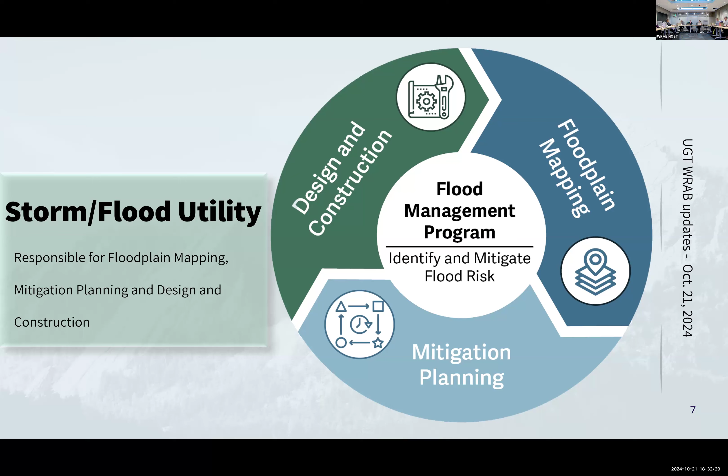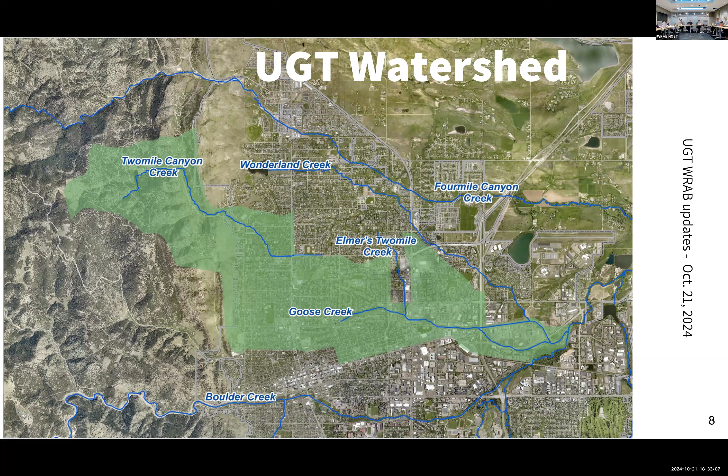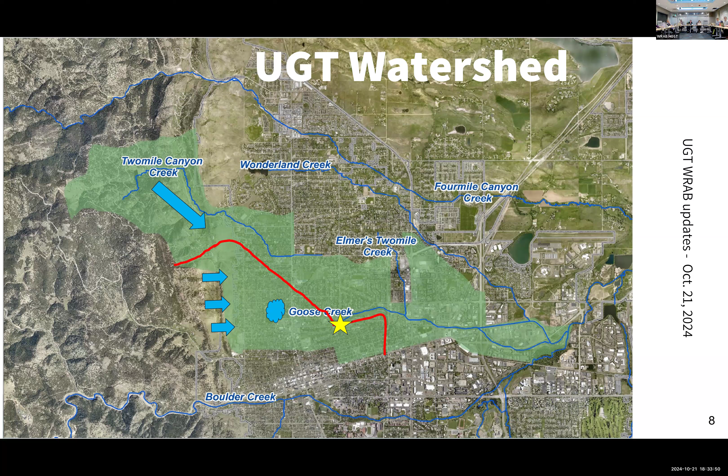Flood flow in the two creeks behaves in significantly different ways. In 2 Mile Canyon Creek, concentrated high-velocity floodwater pours out of the mouth of the canyon at Linden Street, creating a flash flood. Flood flow from Upper Goose Creek flows in multiple paths before ponding in North Boulder Park and continuing eastward, spreading throughout neighborhoods. They come together near Folsom Street and continue easterly to Boulder Creek.

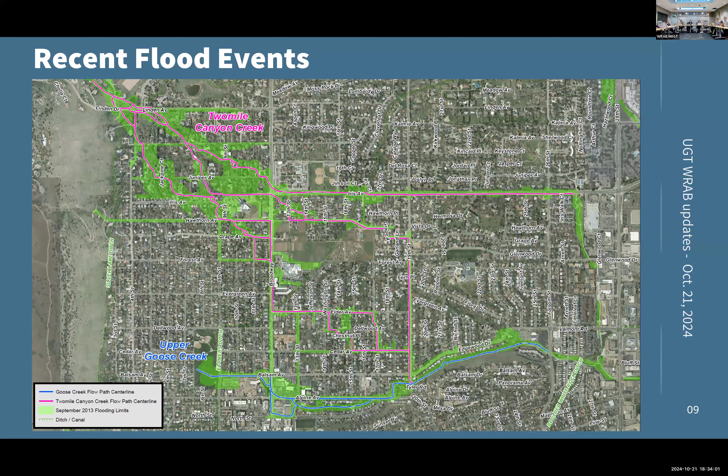Because of the differing behavior of the two creeks, the storm was estimated as a 100-year storm event in the upper reaches of 2 Mile Canyon Creek and a 25 to 50-year storm event in the Goose Creek Basin.

Another way to quantify these storm events is that the 100-year storm has a 1% chance of occurring in any given year, and a 25 to 50-year storm event has a 2 to 4% chance of occurring in any given year.

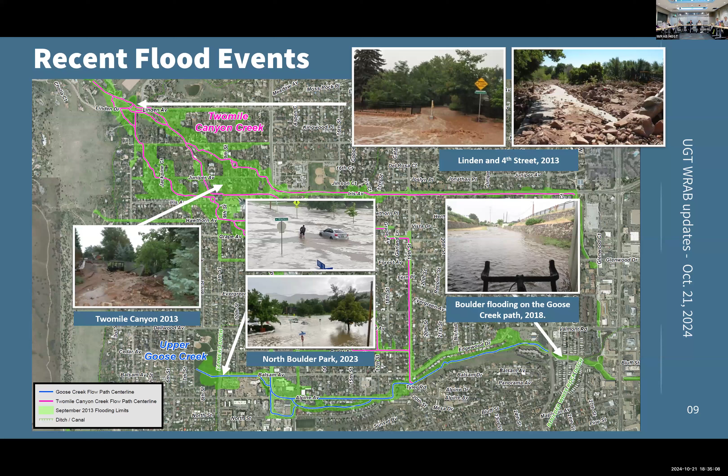The urgency of the Upper Goose Creek 2 Mile mitigation plan was reinforced by even more recent flood events in 2018 and in 2023. The mitigation plan was recommended by WRAB in March of 2023 and approved by City Council in May of 2023. The plan included extensive outreach and engineering, and identified protection for over 500 homes from the 100-year flood for an estimated construction cost of $43.2 million.

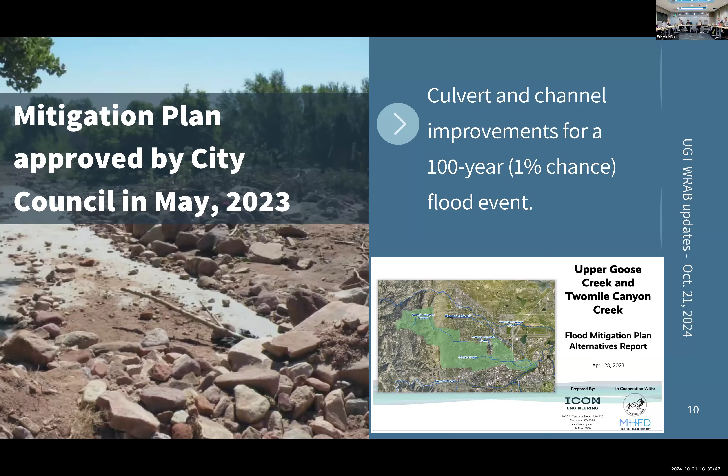At the request of City Council, a robust community outreach effort was undertaken to reintroduce the mitigation plan, gather input, and inform the community of the results. The storm flood team hired a communications manager who created multiple forms of communication, such as website updates, mailings, flyers, and an email address specifically for questions and comments about our flood projects. We did even more. We instituted open office hours and held community meetings in local schools, offering more in-person opportunities to engage with staff and ask questions.

From our outreach efforts, we gathered community interests that are extremely important to our flood projects. Everyone wants to understand the level of flood protection and the accuracy of data used to predict flood extents. Of course, there's a sense of urgency for flood protection.

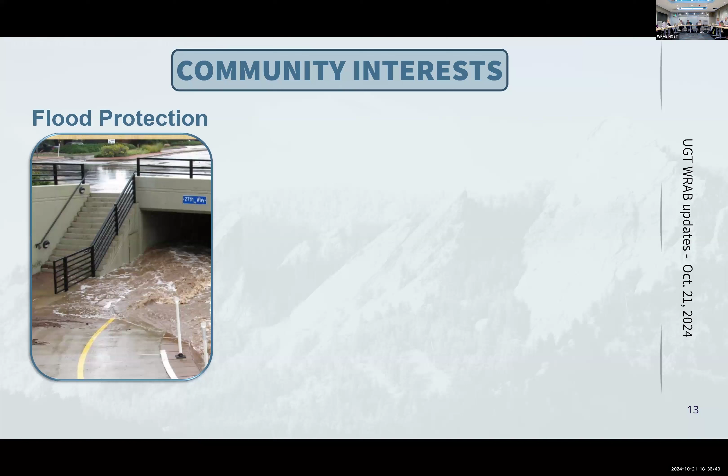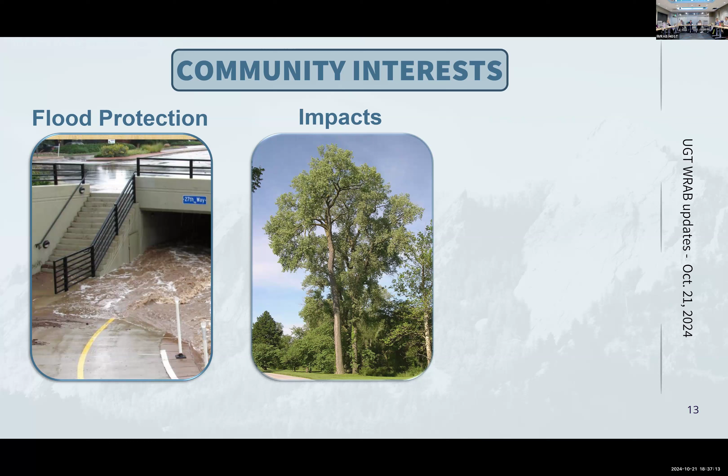Every project has impacts as the project is taking place. We recognize that wildlife utilizes the areas in and around existing creeks, and there are key nesting and denning times. Mature native trees are a valuable resource and will be surveyed, evaluated by an arborist, and protected whenever feasible. Native riparian vegetation and trees will be replanted. Full restoration after construction to an even better, more sustainable riparian habitat is a major goal of stream projects.

Construction is not a pleasant experience, but it is temporary. It causes disruption to traffic and temporary inconveniences. There are concerns over phasing and duration. Often acquisition of additional easements are required, whether temporary for construction or permanent for ongoing maintenance. Projects can be close to backyards and homes. Maintenance is always required after it is all done. The more resilient the project design, the less maintenance is required.

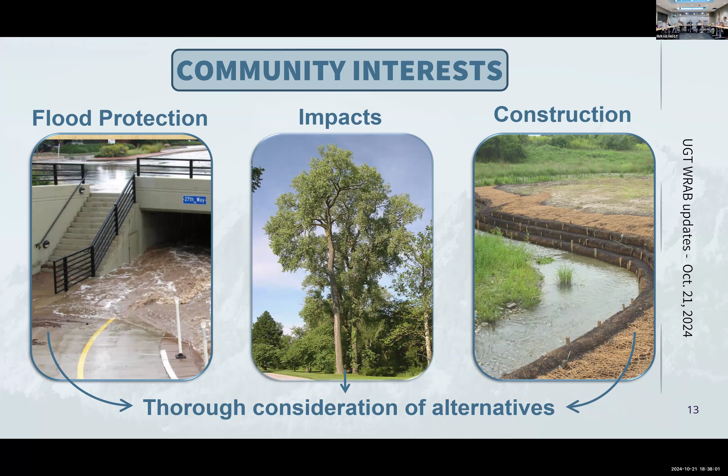Taking all these concerns into consideration in the selection of alternatives, where is the project going from here? Let's take a look at some project updates.

Key project goals align with the comprehensive flood and stormwater plan adopted by the city in 2022. Among these are to protect life and property by reducing the extents of the high hazard zone and the 100-year floodplain, to minimize impacts to private properties and wildlife as a result of the proposed improvements, and to provide variable natural looking features representative of the upstream natural watershed. This means mimicking the natural variability of the creek wherever feasible, and developing a unifying aesthetic along the creek corridor.

Ultimately, these goals come together to design a high-functioning, low-maintenance stream that is resilient to flood events for a long time into the future. To provide this high-functioning, low-maintenance stream, nature-based design has been shown to be the best sustainable solution to flood control.

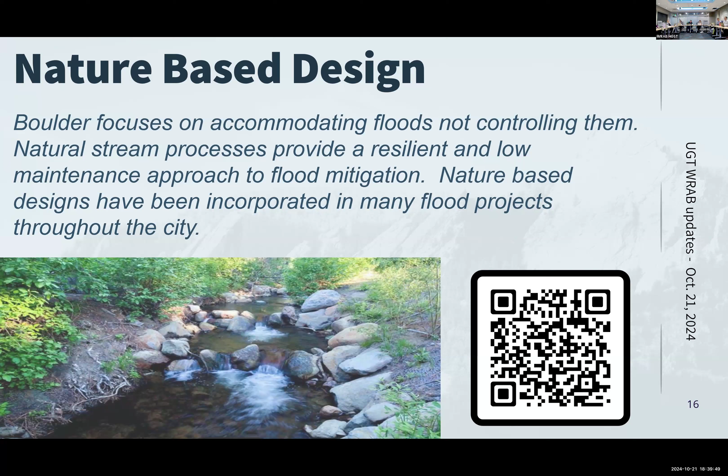This QR code will take you to a presentation on nature-based design on our website. In Boulder, the plan is to accommodate floods rather than controlling them by focusing on natural stream processes whenever feasible, to construct resilient infrastructure that is adaptive to changing climate conditions, and to protect and restore the natural streams where they still exist within the city.

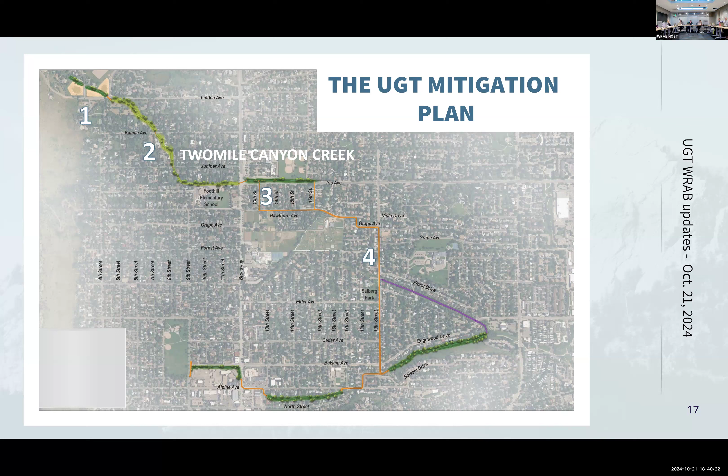Keeping in mind the goals of the city, the Upper Goose Twomile mitigation plan explored several alternatives with community input, such as detention, open channels, and pipe systems. These alternatives were evaluated and scored to determine the chosen alternatives and level of flood conveyance for 4 reaches in Twomile Canyon and for 6 reaches for Goose Creek, as indicated on the map.

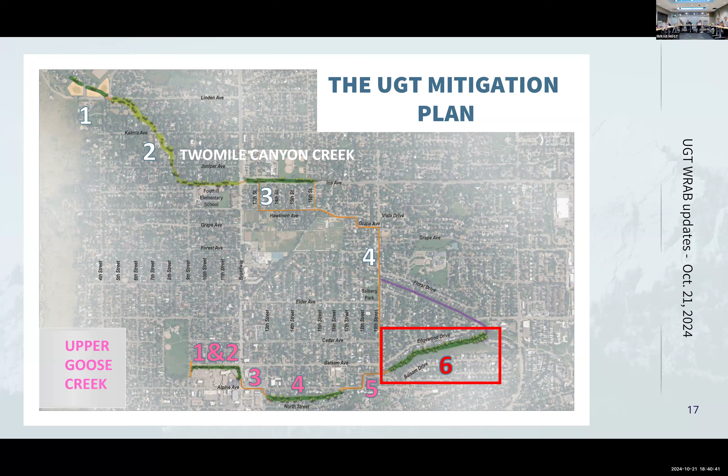The first phase of the mitigation plan is the lower reach of Goose Creek, shown here as Reach 6. This reach is currently an open channel with less than 5-year capacity, situated between the homes along the south side of Edgewood Drive and the hill to the south. Except for a short section on the western end, the creek is almost entirely south of the properties along Edgewood, lying mostly within the properties on the hill.

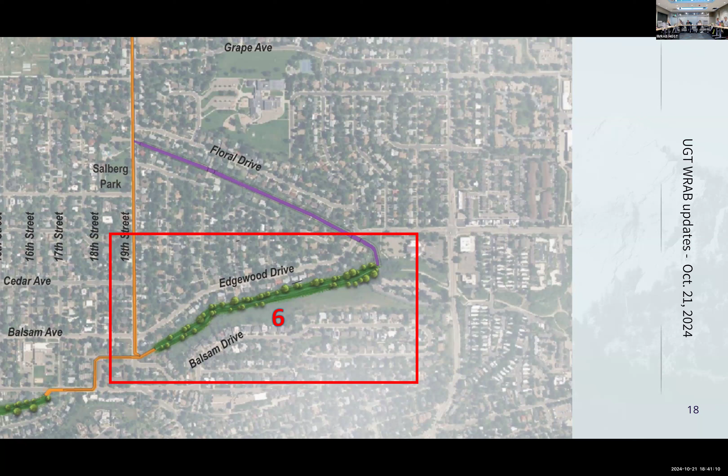The approved mitigation plan recommended a restored 100-year open channel along the existing creek. Within Reach 6, we can see there are 51 structures in the 100-year floodplain, 29 of which are in the conveyance zone. Edgewood Drive and 19th Street are in the high hazard zone.

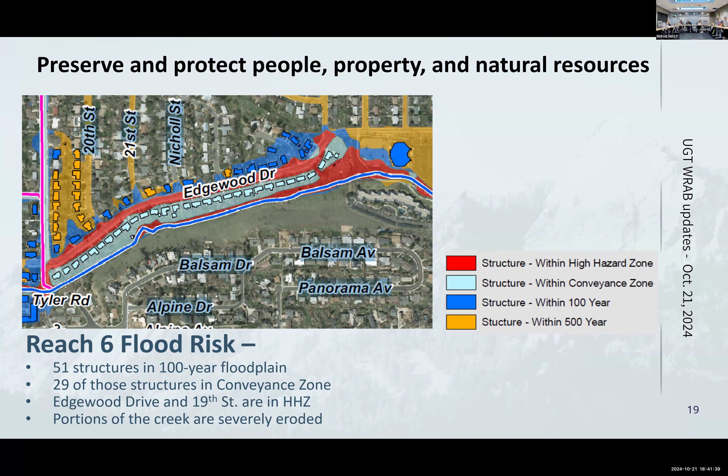Additionally, portions of the creek are in need of restoration. As a reminder, the conveyance zone is the minimum space required to carry the volume of the 100-year storm event. The high hazard zone is where the combination of depth and velocity produces the danger of cars and people being swept away.

The approved mitigation plan alternative recommended improvements to the existing creek along Reach 6 to provide a 100-year flood conveyance with some localized upstream stormwater improvements. Since this reach is at the bottom of the watershed, this project is needed to be able to accept floodwater from upstream in the rest of the watershed.

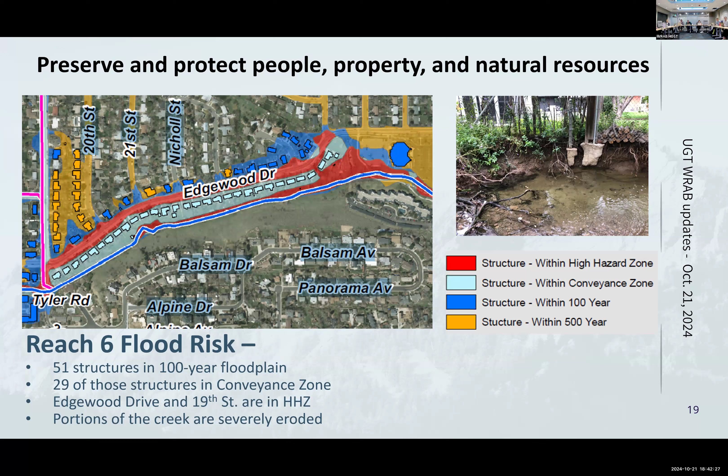Reach 6 is characterized by a steep slope belonging to the properties to the south, dense vegetation along the creek, and limited access through private properties. The majority of the creek lies within the properties on the hill.

Most of the homes along Edgewood Drive were built decades ago prior to the implementation of modern floodplain regulations, thus finding themselves in the floodplain. The tight corridor that remains only has the capacity to convey approximately a 5-year event, forcing additional floodwater into the streets and private properties.

A piped alternative along Edgewood Drive was briefly considered in formulating the mitigation plan, but deemed infeasible and not pursued. Subsequent to City Council's approval of the mitigation plan, there were significant community concerns about the channel approach in Reach 6.

As a result, the city agreed to revisit the concept of a piped alternative along Edgewood Drive. The city hired Icon Engineering to take a more in-depth look at the feasibility, constructability, cost, and the pros and cons of a piped alternative versus the open channel alternative.

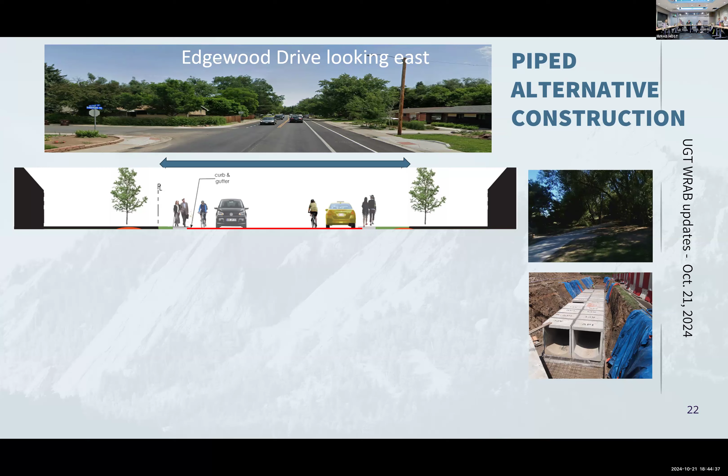To carry the existing flow would require 8 parallel 4x4 foot box culverts, each approximately a half a mile long, for a total width of 40 feet, requiring excavation of the entire roadway. This would cause major traffic and access disruptions for a year or more.

Because the culverts interfere with the existing sanitary, gas, and water mains and services, which cannot remain under and across the box culverts, new sanitary sewer, gas, and water mains would be required on each side of the street under the front yards of the homes on both sides, resulting in service interruptions.

Additionally, trees, sidewalks, and fences would need to be removed for the utility main construction, and trees and fences would not be able to be put back over the tops of the pipes.

A major consideration is that even with the culverts, the pipe system cannot capture all of the water from Goose Creek because the existing creek is much lower than the elevation of the required box culverts under the street. Approximately 20 to 25% of the floodwater will continue down the creek.

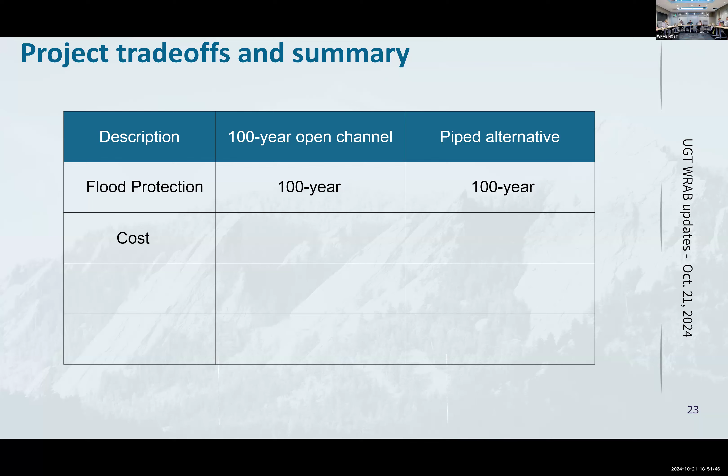I know one of the community members asked that we don't take anything off the table. But when you think about that, and just knowing how hydraulics work, it's not that with a lesser flow the amount of channel disturbance is proportional. You still end up with a significant component of what you would have if you put all of the flood flow in the channel, and then you have all of that disruption to Edgewood Drive and people's front yards as well.

This was not something that City Council asked for, something we did on our own to be responsive to feedback. The community members who organized around this asked us to look at 5 things, and this was one of them. But primarily because of the physics of the situation, and not being able to get all of the water into the pipe, we just don't feel like it's advisable to fix this, especially when you consider it's 5 times the cost and probably doubles the disruption and impacts that people would experience. So that's where we're landing on this.

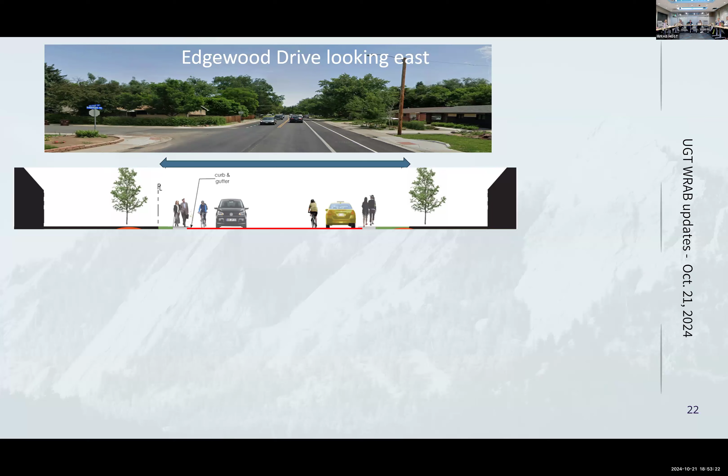And Debbie, I was going to ask you to go back to slide 20, if you can do that. I know you have animation, so that might be 400 clicks, but if we can get there quickly. There we go, that's the one you wanted?

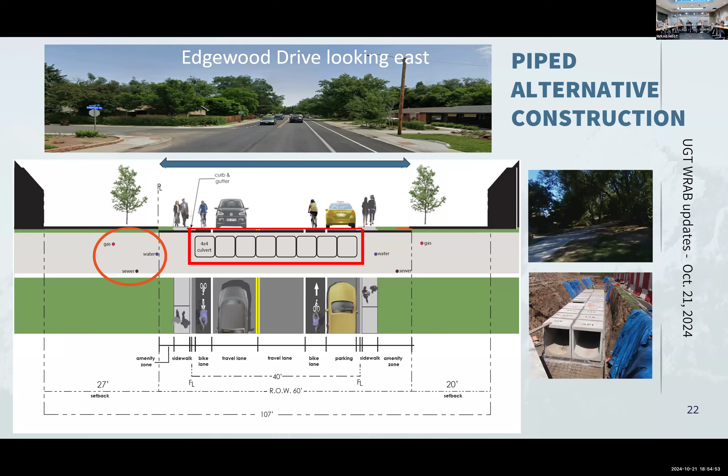So that's kind of where this puts us. And now if you'll go back to the timeline slide, thank you for working with me to get back to that.

So where that puts us, we wanted to do this update and share the information both with the community and the board. It would be our intention to now start working on the design, and the first step would be hiring a consultant to work with us on some of those details. I imagine we would have alternatives that we could work with the community on for the channel configuration and the slope stability and all of those things, with opportunity for the public to weigh in on that.

But that's the timeline that you see, with design happening in 2025 and 2026, and the desire to go to construction in 2027. Regardless of which alternative we brought forward, I know one of the other requests that the community members made was just looking to the city for guidance on how easements and those kinds of things work.

There were basically 5 different requests that they made, including this Edgewood Drive alternative. Of the 5, we have either done them or intend to do them all. So the plan is to work with the community on that. I think that's what we have, and the next slide is probably just queuing up the questions if the board has any.

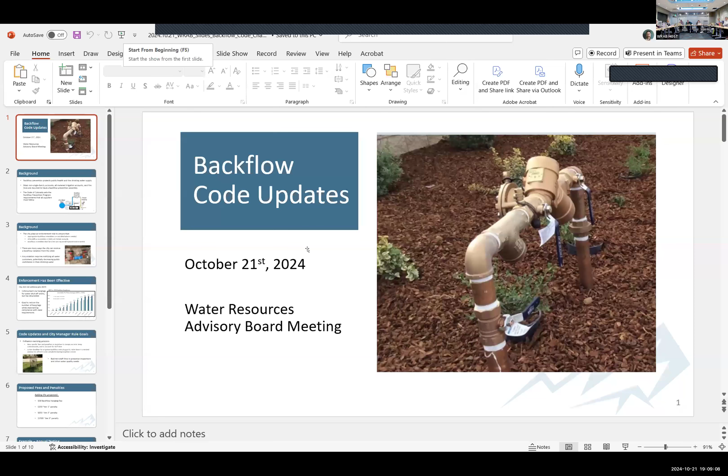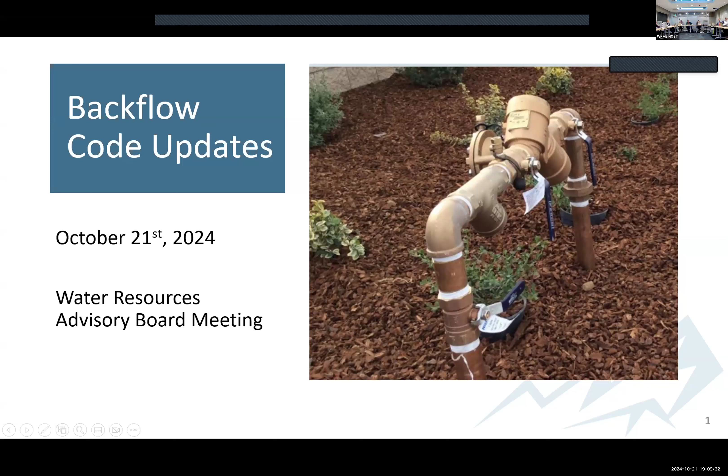Yes, my name is Michael Parrish. As Megan said, I'm water quality compliance program manager in the backflow program, Utilities Department, and thanks for giving us a little time to update you on these backflow code updates. I know everyone was dying and excited to hear all about it.

So backflow is the reverse flow of water, in this case water from private property back into the city's water main. That can carry contamination, so to protect public health and our drinking water supply, we have backflow prevention, mainly backflow prevention assemblies, like this picture here that you see. Most non-single family accounts, all metered irrigation accounts, and all fire lines are required to have a backflow prevention assembly. The vast majority of these are privately owned and maintained.

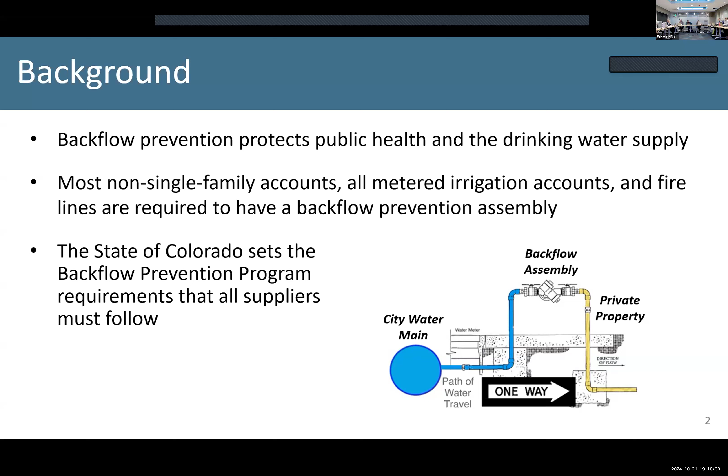As was mentioned, the state of Colorado through the CDPHE sets the backflow prevention program baseline requirements that we have to meet, and all suppliers in the state have to meet. So that means the city is really playing an enforcement role in trying to make sure we're doing everything we can to protect drinking water. We have to ensure the appropriate backflow assembly type is there for each cross connection where it might be needed, that it's adequate for the hazards present, and such. If it's not, it has to be installed within regulatory timeframes.

We have to track all of the backflow assemblies that we are tracking as containment assemblies - there's about 7,800 or so. We have to make sure they're tested annually. State requirement is we have to get 90% testing ratio each year, and no individual backflow assembly can go 2 years without being tested. So as you can imagine, there's a lot of tracking and follow-up and Excel spreadsheets that have magically been put together to help us try to track that all down.

Backflow assemblies, if they fail a test, need to be repaired or replaced and retested within regulatory timeframes, which is a long way of saying there are many different ways we can get a backflow violation from the state. The city of Boulder could receive that violation. Any violation we get, we must notify all of our water customers, which has the not insignificant cost of sending a letter to everyone, but also the very significant impact of potentially decreasing public trust and confidence in their drinking water.

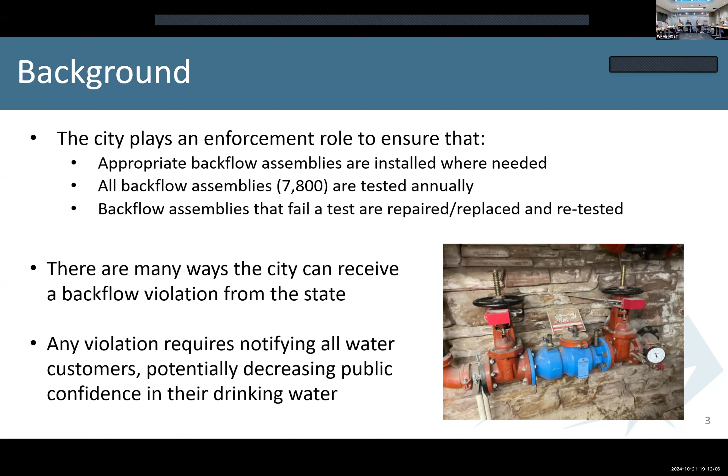So enforcement is how we get there, and our main enforcement tool at this point is the threat of water shutoff. Hang tags are what we use, that's a little yellow tag that warns folks on their door: hey, 10 days, water will be shut off if we don't come to an understanding or an agreement and resolve whatever the situation is.

The threat of a water shutoff is an impactful tool for us. It also has a lot of downsides. We spend a lot of staff time tracking who needs a hang tag, hanging the tag on the door, talking with the customer there, follow up after the hang tag is out, and making calls if we're getting close to the shutoff date and we haven't heard from folks. So it's very time intensive for staff.

And then we're finding now, a couple years into it, there are certain property managers or companies that are waiting to get a hang tag to do anything, which is problematic. And really significantly, the people who would be very impacted by a water shutoff are not the ones responsible for scheduling a backflow test, like a tenant in a multifamily building.

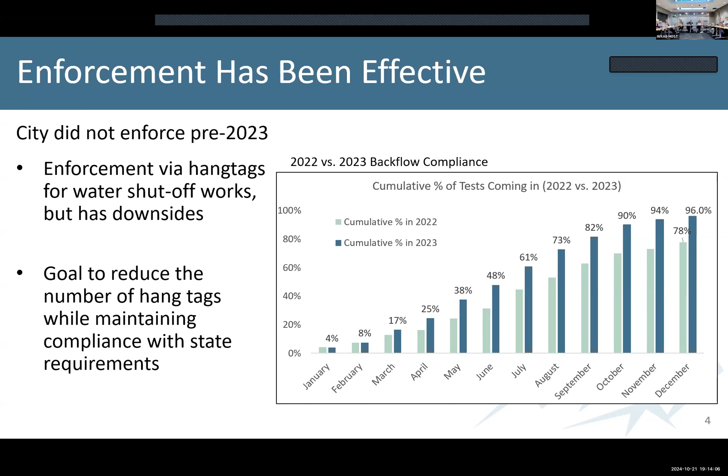So really our goal with these code changes that we're proposing is to try to reduce the number of tags that we have to hang, all while still meeting our state requirements.

So these specific fees and penalties, we hope that people comply on time before a hang tag even comes out. Hopefully we'll keep them sticking to their schedules and agreements that we come to together, and account for staff time. In tandem with the code updates, we're also bringing forward a city manager rule.

That rule will have an earlier deadline for irrigation backflow testing, August 1st. We have a limited time window to work with for irrigation and backflow testing - if there's no water to the backflow, it can't be tested. So once things are winterized, our only enforcement tool is locking off a meter, which is a huge time intensive operation for staff, both in the fall and then in the spring on the first warm week when everyone would like to have their locked meter back on to irrigate again.

So we're really trying to cut that down, and that's been fairly successful in practice, but this city manager rule, I think, will really help establish that. And as it's kind of been mentioned, if we can spend less time enforcing a minority of customers, we can do more site surveys, more proactive inspections, and get out more educational sides of things. So it would be a really nice change for staffing as well.